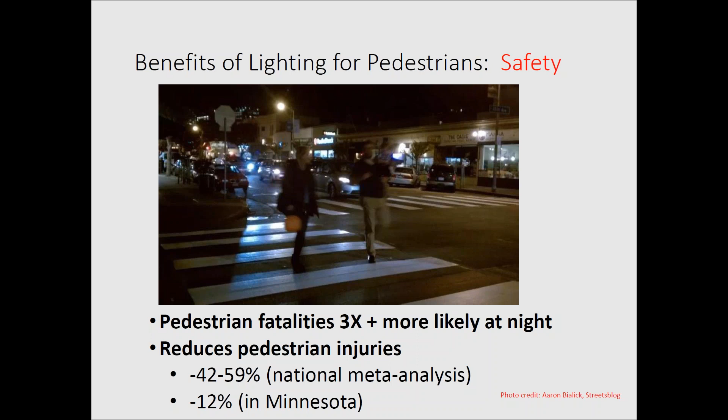Similarly, there are some clear benefits for personal security and comfort related to crime, reduced tripping, and so on. But it can be a little difficult to assess how much of an impact on crime is due to the lighting. If you put lighting enhancements on Street A, is it just moving crime to Street B?

Is it the visibility improvements alone? Because increased perceptions of security may draw more people to the area, and that itself may discourage crime. I've also read a theory that improved lighting can give a message of a more orderly neighborhood, and that can even impact the daytime crime rate too. So if you're trying to assess nighttime versus daytime, and assuming it's lighting, that's further complicated.

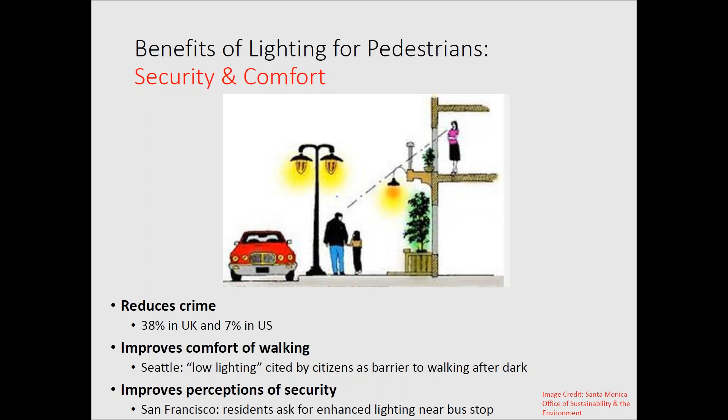In San Francisco, we have historic streetlights on Market Street and Van Ness Avenue, two main downtown streets, and they have been the focus of some serious civic disputes when there's been any threat to their historic nature. Improvements in ambience apply not only to sidewalks and streets, but also often to civic plazas. For aesthetics and entertainment, light fixtures and lighting can interact with art, can even be the art.

I think Vancouver, Canada, the Winter Olympic Village area of Southeast False Creek, is a notable example, with programmed light shows, and also a great variety of different types of lighting fixtures used in this area that make it much more interesting at night.

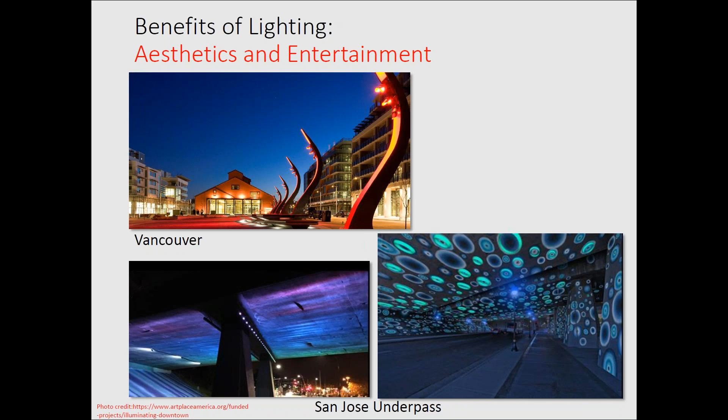The nearby city of San Jose, California, has had a program illuminating downtown that, for example, included reflective art to make freeway underpasses more inviting, interesting, comfortable to walk through, even changing the reflective light levels according to pedestrian and vehicle detection. Of course, there could be some concerns if this becomes distracting.

There's also the potential of lighting to contribute to traveler information. San Francisco has had a concept seriously proposed, not yet fully funded or implemented, but pushed by a nonprofit, to use lights above the surface of our main transit corridor street to show the subway trains moving below, and also to project information on buildings about the subway movements. So those are a number of potential benefits.

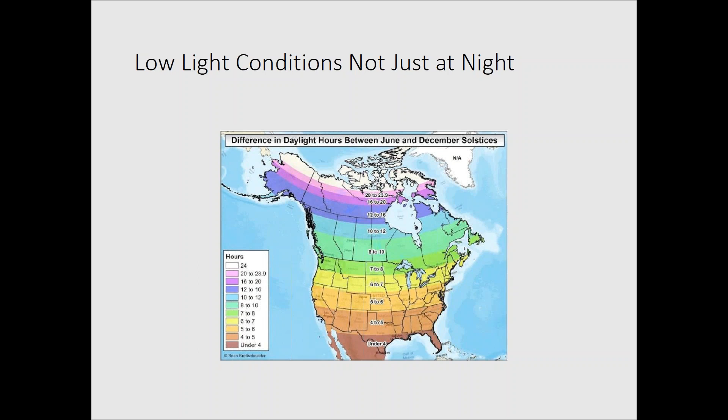I wanted to point out that, of course, low light conditions are not just happening at night. There is a significant amount of daytime in partial or complete darkness, depending on the time of year and the latitude, and thus the benefits of any lighting enhancements can be greater than if you were thinking of them just as applying at nighttime. I'm going to touch on some of the costs or potential concerns with lighting.

First off, there's the financial cost. Lighting improvements can be very expensive. Municipal street lighting is typically a major part of a city government budget. Pedestrian scale lighting substantially increases the costs, and that can make a hard choice of deciding to invest in lighting versus other improvements, and in which locations.

Other potential issues with enhanced lighting, besides the financial costs: you have glare, unwelcome light in travelers' eyes causing disability or discomfort, unwelcome light raising safety, privacy, and comfort issues, and even astronomy and health issues. I think Ron Gibbons is going to speak more to that.

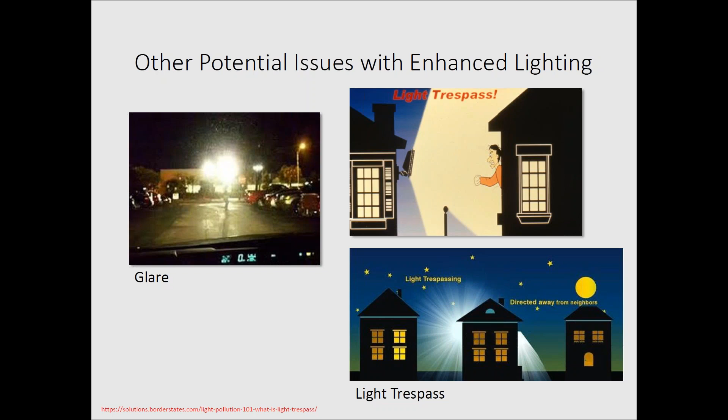Now, looking at some more innovative options, I know Ron is going to speak to the light-emitting diodes or LEDs that are becoming increasingly a common form of lighting, so I'm not going to touch on that. But one other option that looks promising, especially for isolated crosswalks, mid-block crosswalks, is bollard lighting. It's been field tested in several locations. The idea is to illuminate pedestrians in the crosswalk, but not so much the background, to make them stand out.

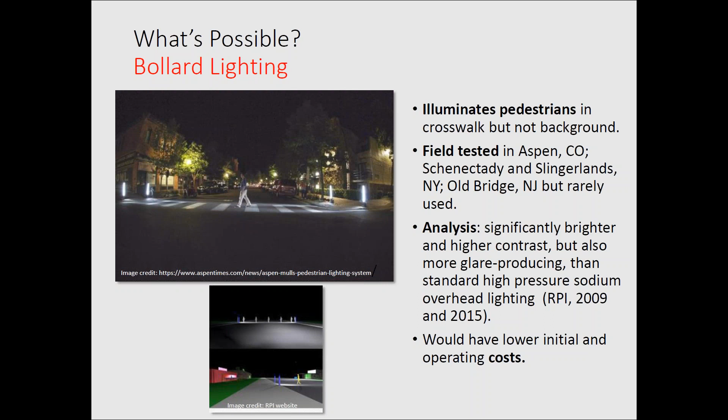However, in Schenectady, when they surveyed the pedestrians about crossing in this type of crosswalk, they were quite positive on average, saying they agreed somewhere between somewhat and completely that they felt safe and secure and didn't experience glare or dark areas. Also, you can use, and they did use, pedestrian push buttons to increase the light levels when the pedestrian is actually crossing, and that can, of course, act as an alert to the drivers to pay more attention.

Smart lighting, it's also called adaptive lighting, that's used for energy savings and safety, especially. I was involved in this multi-city federally funded pedestrian safety measures research project. San Francisco was interested in testing something like what Las Vegas actually did, that is shown here, to use supplemental or higher levels of mid-block crosswalk lighting when pedestrians were detected by microwave or infrared.

And what the UNLV, Nevada, Las Vegas researchers found was a statistically significant increase in drivers yielding to pedestrians. So positive safety impacts. However, relatively high cost compared to some of the other measures like signs and striping and signal phasing changes, and therefore they judged it to have overall fairly low cost effectiveness.

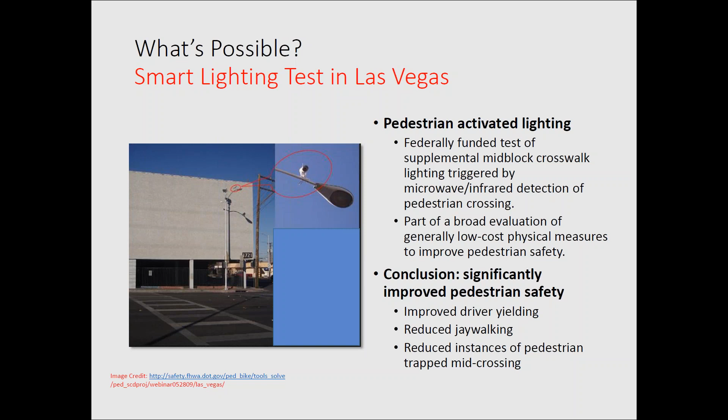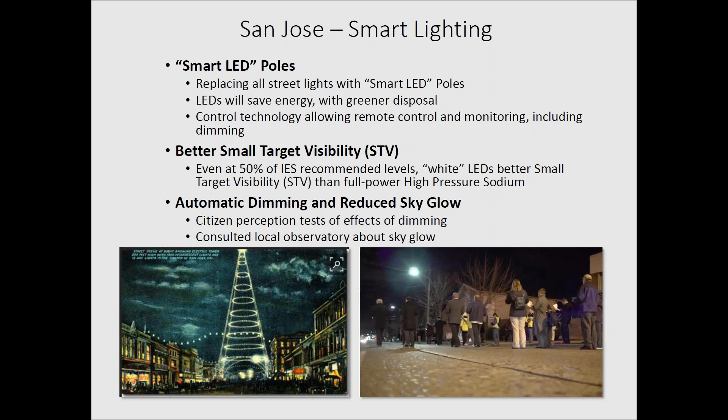Now, much more recently, San Jose has gone somewhat the opposite direction in trying to focus and limit the lighting through remote control technology and LEDs, while also maintaining its effectiveness. I know Ron was involved in the evaluation. Interesting that citizen input was very important, and they even asked the local astronomical observatory for input about sky glow concerns.

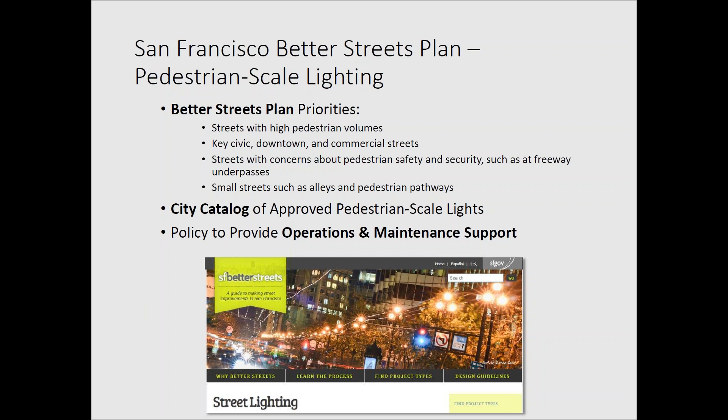And for San Francisco, I'll talk briefly about some of our policies and a couple of projects. First off, San Francisco uses a streetscape pedestrian guidebook or manual, the award-winning Better Streets Plan, which includes a number of policies on, for example, where you would put in pedestrian scale lighting. In addition, the city maintains a list of approved pedestrian scale lighting fixtures and has agreed to maintain them when they were installed through a city area or corridor upgrade project that is typically a transportation planning and design project.

Frequently in our transportation planning projects, citizens express interest in enhanced lighting. There are institutional and other reasons why it can be difficult to provide high quality lighting through these projects. Interagency coordination is required, and it can be complicated, with other departments responsible for the lighting itself. And then the problem may be the tree canopy blocking lighting, and then you're dealing with yet another department or bureau about the tree trimming. You're dealing with potentially other civic disputes or issues.

We've found that citizens may complain about lighting at an intersection that meets the Illuminating Engineering Society IES standards, but it could still be challenging for drivers to detect pedestrians if there's poor contrast, other distracting lighting, poor background luminance. And finally, funding is another issue. For example, our transportation sales tax, the bread and butter funding source for a lot of transportation improvements here, generally doesn't support lighting enhancements.

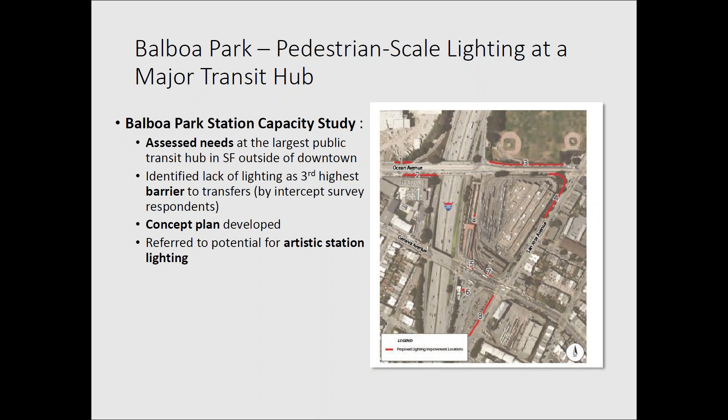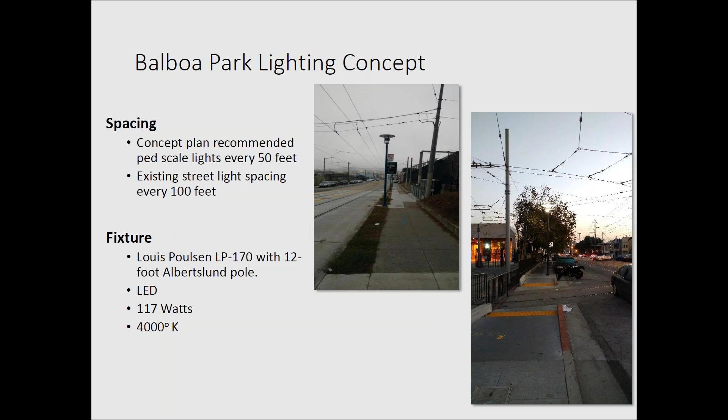And the pedestrian scale lights were installed pretty much as mapped, and they were installed about every 50 feet, and that supplemented the existing street lights that were spaced about every 100 feet. This concept turned out to be very successful, effective but unobtrusive lighting with good color rendition.

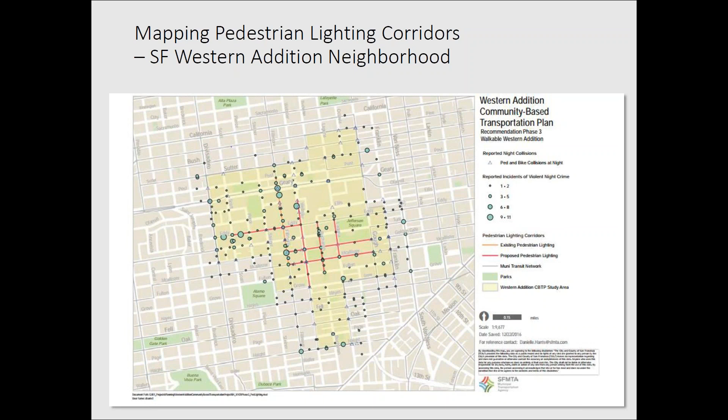And the last project I'm going to mention is a transportation planning project in a lower income area near our downtown, in which pedestrian scale lighting was prioritized for those red blocks based on public transit service, nighttime safety needs, and security needs. And I know James Lee is going to discuss Seattle's experience in prioritizing locations for pedestrian scale lighting.

So to conclude, I think there's a lot of room for additional information provision aimed at transportation planners and engineers, perhaps a manual that supplements all the technical material and the research that's out there. And I am pleased to be a part of that. So that concludes my presentation, and I'll look forward to our discussion later.

Okay, wonderful. Thank you so much, Frank. I think that's a great collection of good lighting principles, as well as some highlights from your neck of the woods. I think we'll keep that theme, and we'll visit Seattle next and find out what's going on up there with respect to lighting projects. And we have James Lee, who will take over the screen shortly and share some of the experiences and different lighting projects that have been happening in Seattle, and sort of how they fit into the bigger picture of what's going on there. So James, I can see your screen, and please go right ahead whenever you're ready.

Perfect. Hi, everyone. My name is James Lee. I'm with the Seattle Department of Transportation, and I'm here with you today to talk about lighting projects in Seattle. So a little bit of overview. I'm going to give some background about Seattle and the program that I'm in. I'm going to talk about the lighting guidelines that we use for LED lighting. I'm going to go over some projects, and then Q&A is reserved at the very end of all these presentations.

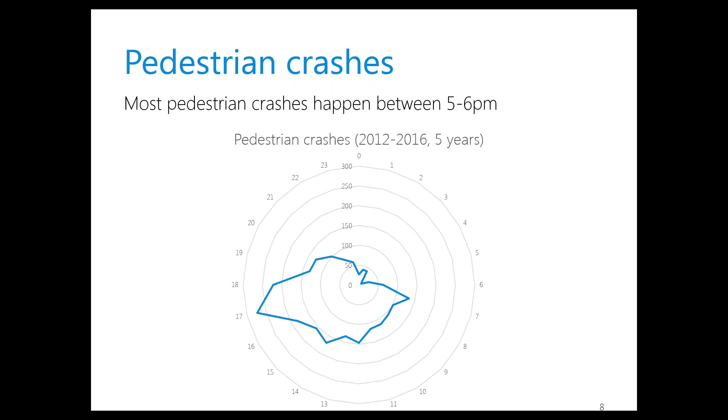Our lighting guidelines are based on the CIE 115. The CIE provides recommended practices for designing lighting systems for motor and pedestrian traffic based on several parameters present in the roadway system, and it places weights on the roadway characteristics from -1 to 2.

So when you go through all these criteria, you add up these weights and then you plug them into the chart below, and it'll tell you how many foot candles you should light the intersection or the roadway segment to. So I can go over these. Generally, higher speed limits present more risk for people walking or biking when struck by a vehicle.

With center turn lanes and medians or one-way streets, center turn lanes and medians can help block glare from oncoming vehicles from the opposite lane, so less lighting is needed. With bike facilities, generally, higher weighted values are assigned where bicycle traffic is anticipated. With the Pedestrian Plan Priority Tier, I'll go into this a little bit later, but more lighting should be placed where we have a higher pedestrian classification. With block length, shorter blocks mean more conflict areas due to increased intersection density, creating more interactions between people walking, biking, and driving.

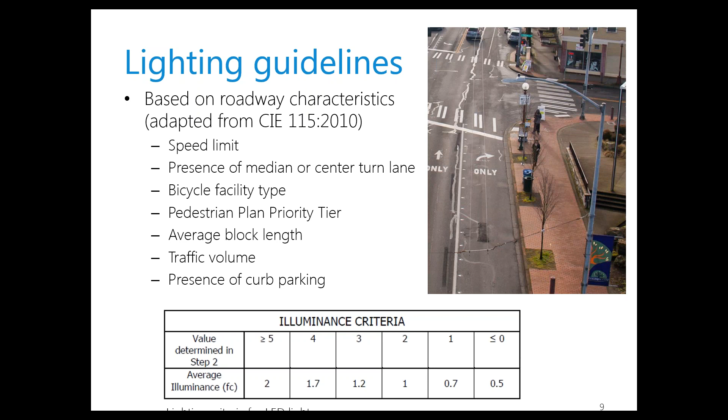With traffic volume, based on an FHWA study, lighting levels should be increased on roadways with high average daily traffic volumes and reduced on roadways with low average daily traffic volumes, since light levels have an impact on reducing crash risk for roadways. And with the presence of curb parking, parked vehicles may create potential for pedestrians to cross mid-block to get to their vehicles. So all these create some kind of conflict that we factor into our illuminance criteria.

With our pedestrian lighting prioritization, we focus on 5 criteria here. Pedestrian demand is based around land use and pedestrian generators. With socioeconomic analysis, we look at equity factors such as socioeconomic and health factors, such as car ownership, diabetes rates, and disability rates. Street type is based on the street segment and how we intend to use it. With lighting gaps, we have areas where we have no lighting. This could become a barrier for people who take the bus and need lighting for security between the bus stops and destinations.

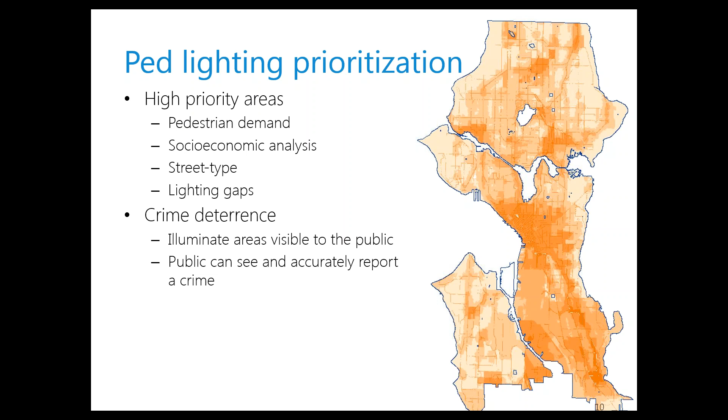And with crime deterrence, I can tell you one story. Back in 2009 in the city of Seattle, a police officer was killed. And when they were asking witnesses to identify the car that got away, the witnesses were describing the car as a gray colored car, but in actuality, it was a light blue or sky blue car. And the reason they couldn't identify this car very clearly was because it was parked under a yellow high pressure sodium light. So with our conversion to LEDs, the white light, we see all the colors. So it helps with the personal sense of security when you're a pedestrian walking, and it also helps the police when they are asking witnesses to identify what this person was wearing, what they were driving, and how they're getting away.

With our LED conversions, we converted all our high pressure sodium lights to LEDs. We started out with residential streets in 2010, and we just completed our conversions of the arterial street lights this year. We have a current relationship with Seattle City Light, which is our lighting utility company. Our memorandum agreement with them is that we, the Seattle Department of Transportation, dictate the lighting levels for the roadway, and the utility company, Seattle City Light, is responsible for installing, removing, or maintaining these lights.

And with the community feedback, when we first did our installation of the LEDs, we were piloting these LEDs with a 5,000 Kelvin color temperature. We heard from people that with the 5,000 color temperature, the lighting felt very cold. So we experimented, and we eventually settled on 4,200 Kelvin, which is pretty standard across all the lighting fixtures that we use, cobra heads, pedestrian lights, and it's a lot warmer than the 5,000 Kelvin temperature, and it's pretty close to the color temperature of moonlight. So that's what we settled on here in the city.

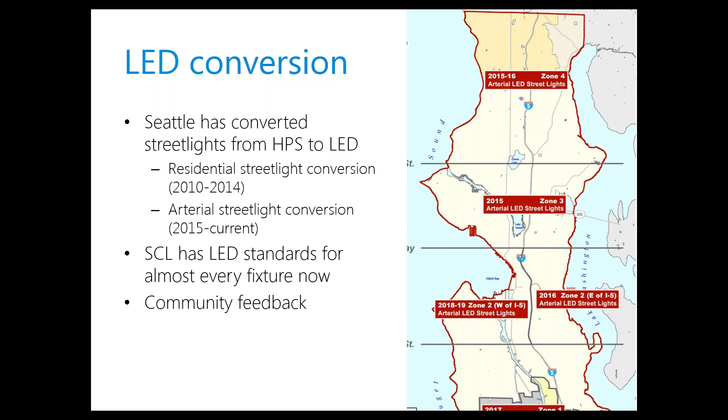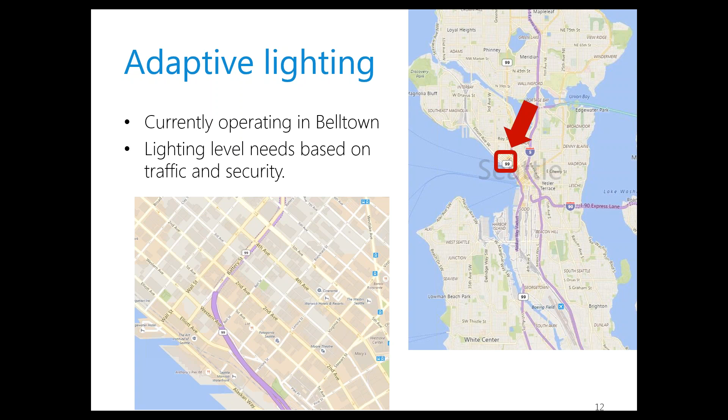With adaptive lighting, we are currently operating in our Belltown area of Seattle. This area has a lot of nightclubs, bars, a lot of nighttime activity. So the lighting level we used for the adaptive lighting here was primarily based on traffic and security. We use about 80% lumen output from dusk to 1 a.m., and this is for traffic in that area. And after 1 a.m., when all the clubs and bars let people out, we increase that lumen output all the way to 100%. So this is only focused in one area.

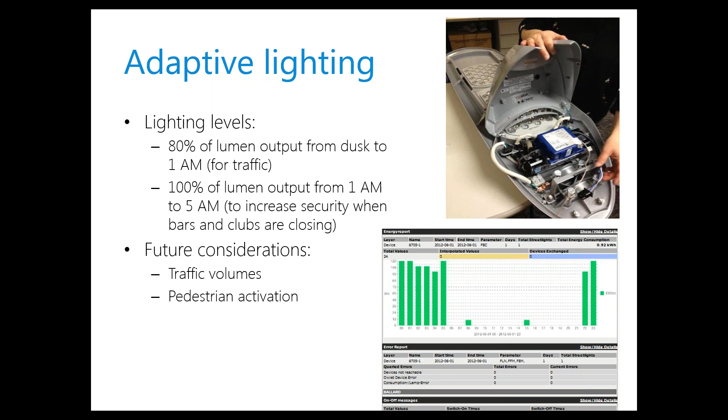Some future considerations for adaptive lighting are we might take a look at traffic volumes and change the lighting based on that, or maybe use some sensors and change how much lighting is used based on pedestrian activity.

The importance of this project was to provide a connection between existing routes on the Ballard Bridge to two RapidRide transit stops. So RapidRide is our bus program where we have buses running at about 10 minutes or less frequency. We take an existing line and then we look at bus stop consolidations and off-board fare payment systems to reduce travel times by 10 to 15%.

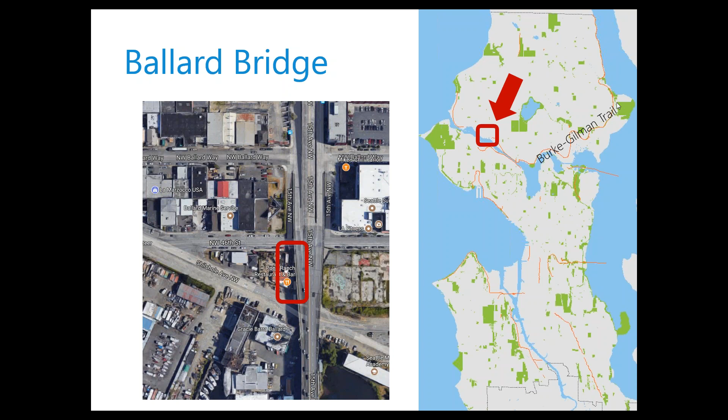There's a lot of people walking and crossing the street and using this path here. The project goal was to improve the connections between the Burke-Gilman Trail. The Burke-Gilman Trail is right here. It's this orange path that extends all the way from the north city limits, if you can see my cursor, and it wraps all the way around. It's 27 miles long. And it connects people who are biking or walking along this path to these two RapidRide stops.

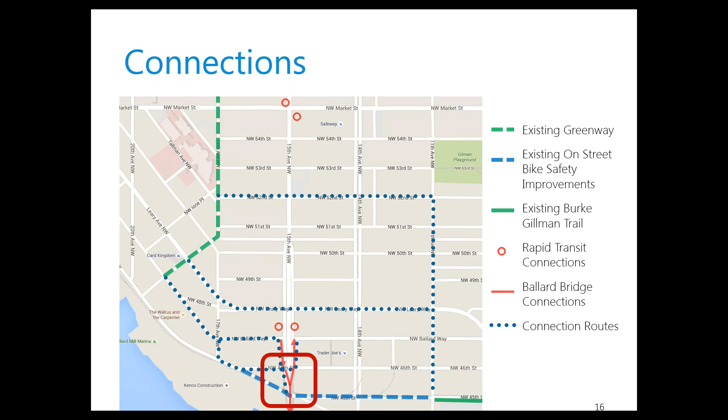And since we have a deadline for this project, it's FTA funded, we need to construct this project quickly. So we need to find some off-the-shelf lighting products. In general, poles and light fixtures have long lead times of about 3 months, and we wanted to construct this lighting project in well less than 3 months.

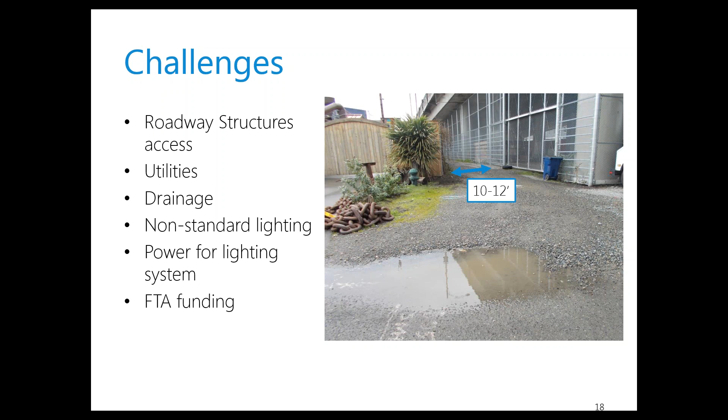For the installation, we found a linear LED product that includes extruded housing to make installation easy. The extrusion housed all the cables, LED strips, and frosted lenses for a clean installation. We not only used a marine adhesive to glue this to the bridge, but we also doweled the extrusion housing so that it won't jiggle loose or fall off due to the vibrations of the bridge.

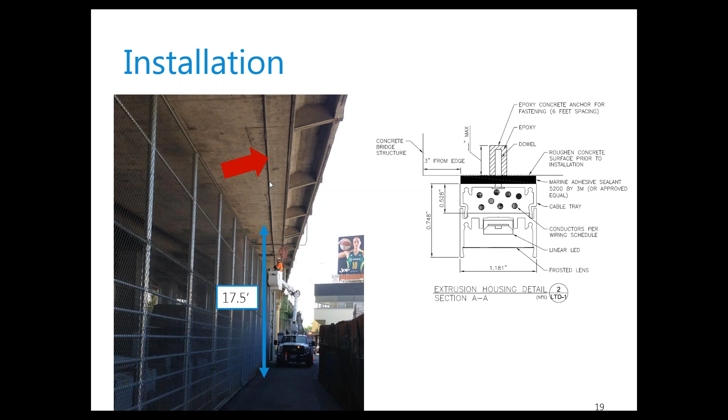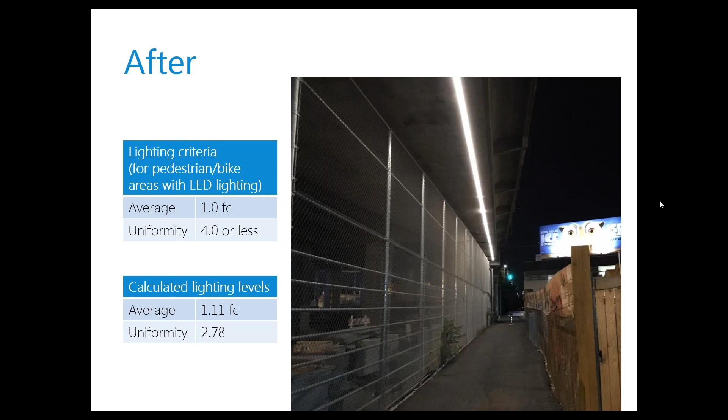And this is what it looks like at night. This met our lighting criteria for pedestrian and bike pathways. Our lighting criteria is 1 foot candle and a uniformity of about 4 or less. Our average is 1.11 foot candles, and our uniformity exceeds what we're looking for. So 2.78 uniformity means the lighting is pretty uniform here, and it's not focused on one area; it's pretty uniform lighting throughout the whole trail.

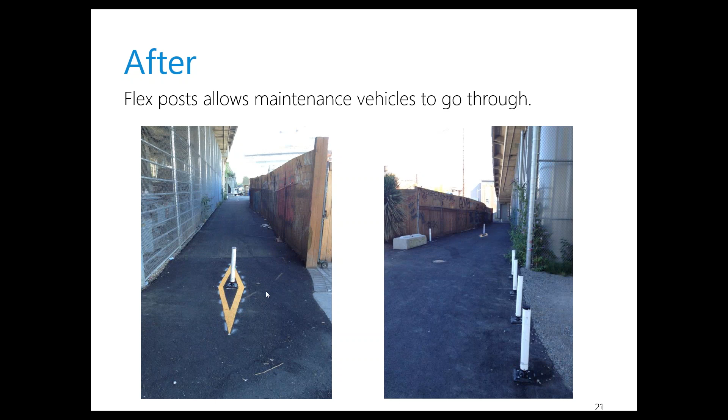We also installed some flex posts, which allow maintenance vehicles to access this maintenance yard or go through this area pretty easily. These flex posts can be run down by any vehicle, and they also help delineate bikes going through this area.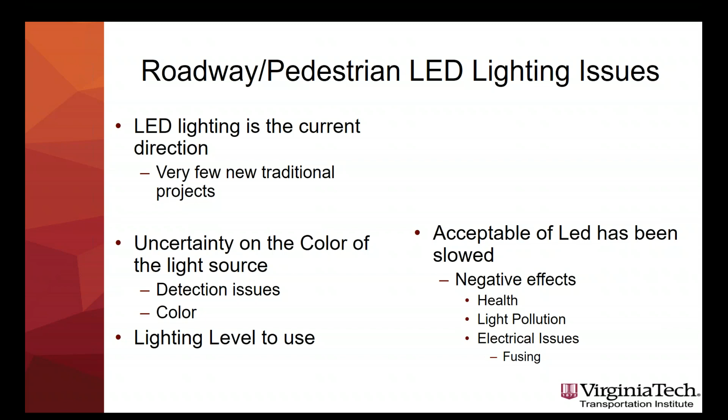Some of the things that are limiting the application of LEDs right now, I'd say first, though, that LED lighting is the current direction. I don't know of anyone right now who's designing anything with traditional light fixtures. But the uncertainties that are kind of impeding some of those things were the color of the light source, the impact on human health, which lighting level to use, and all those are coming into play. And then of course the negative effects, light pollution, electrical issues, fusing, all those things come into play as an impediment to LEDs. So our research is really focused on looking for just-right lighting.

And what we are talking about there is looking at what I refer to as the six factors of lighting design. There are the six, and we're trying to balance these things. So obviously roadway user safety, so drivers, pedestrians, crash reduction, pedestrian safety, all those things come into play as one. Energy consumption is always a concern. Impact on health, public perception and acceptance. Are people comfortable in the space, and are they willing to use it? Impact on light pollution, impact on surrounding areas, flora and fauna. And so one of the things that we've talked about is the way to balance some of these things is really to start looking at adaptive lighting.

And so our approach now, which lighting designers are beginning to talk about, is to consider light as a drug. And with every drug, there's a benefit and a side effect. So if we provide lighting that can make a pedestrian feel more safe, but it is changing bat migration, we have to balance those two things. And so we have to determine the appropriate dose that will provide all the benefits and minimize the negatives. And the nice thing about lighting is it's what we call a rise and plateau kind of response.

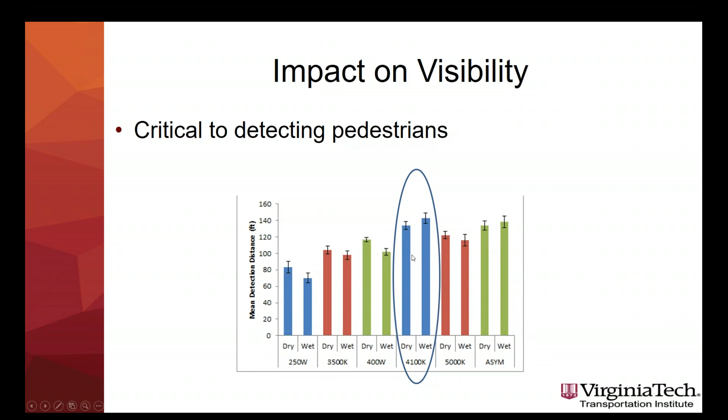And so this is the same data. I just removed some of the dimming and some of the other things that came into play. But you can see the comparison of a 400 watt high pressure sodium to the other whiter light fixtures, with 4100K coming out. What we believe is happening here is the addition of color contrast. So in a high pressure sodium or low pressure sodium world, color doesn't really come into play. We already heard the example of the gray car. And so now if we start adding color to the world where reds look like reds and blues look like blues, we're starting to have an additional benefit through that, and that's one of the benefits of the light sources.

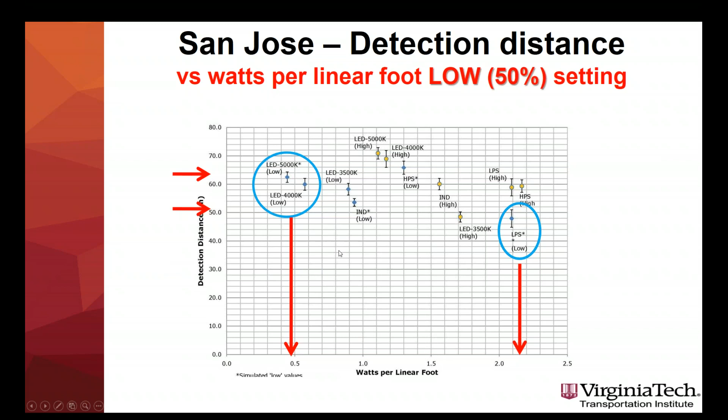And so then we said, well, what happens if we dim? So we actually reduced the lighting level to 50%, and the dimmed LED dropped down to the same levels there were under the low pressure sodium at the beginning, but we then took another 50% off the energy use. So now we're at a quarter of the energy consumption with this installation, but have the same detection. So those are the kind of numbers we're seeing when we start adding in these white light sources. And again, in this case 4,000 popped out as being the highest performance, again, we believe, because of the color contrast.

So the negative impacts of roadway lighting. We've got this positive benefit of roadway lighting, and have started to look at CCT. Now the negative impacts: obviously health effects, sky glow, and what we refer to as the bugs, buds, bears, and bass. Buds being flowers, not beer. But anyway,

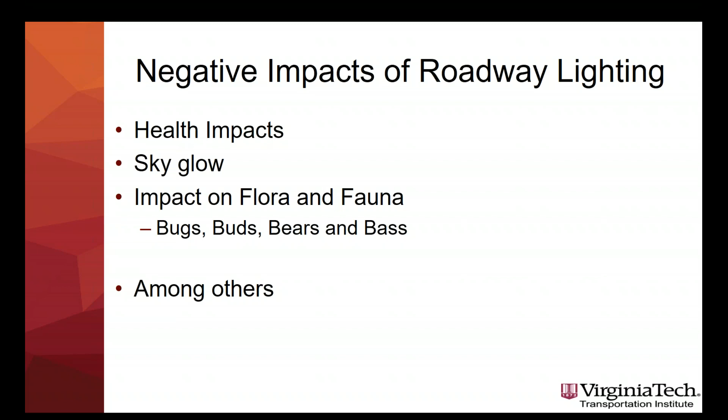so one of the things that happens is as we start adding lighting into the environment, we're impacting anything with eyes. So sea turtles, migratory animals, all those things. And for example, a robin, if it nests in an area that's close to a light fixture, it actually starts singing much earlier in the morning.

So it can sing up to 2 hours earlier in an area that's close to a lighted roadway. So these are all things we need to consider. The AMA came out with a report that says use 3000K. They did not consider the driver safety. They did not consider the crash risk, visibility.

All they talked about was primarily the impact on humans, migratory animals, sea turtles, and sky glow. So they didn't talk about these other issues. So it's not really a balanced report, and so we're doing some work right now to deal with that. But basically, there is a strong link between lighting and health, and this is particularly for shift workers. It impacts your sleep, your alertness, your general health, and your melatonin levels.

And so your cell phone, your TV, they're all producing a lot more blue light. We're experiencing a lot more blue light than we used to. We're sensitive to all light, but our highest sensitivity is in the blue range. So it's highly dependent on dosage. This impact depends on the spectral effect and the amount of light you're experiencing and the timing

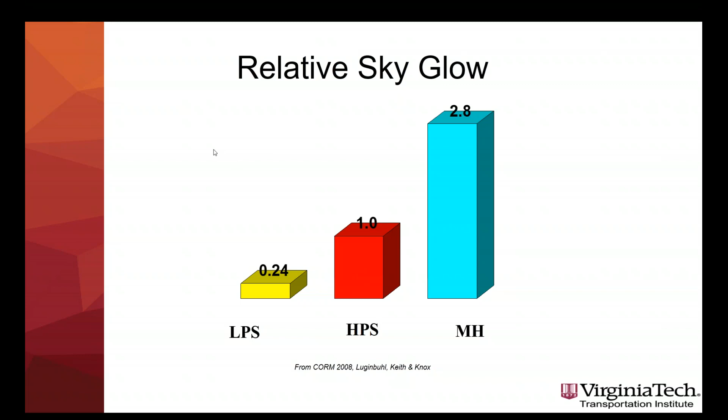When the night starts getting longer, that triggers the plant to flower and create beans, and all the energy from the plant goes into the creation of that bean. So basically the plant consumes all of its energy and kills itself to create the bean. So under areas where the light fixture is, that transition doesn't happen, the flowering doesn't happen, the plant keeps growing. So you find that the plants grow very tall, but produce very few beans.

So our solution approach is adaptive lighting, and basically the goal there is to get as much lighting out of the atmosphere as we can, and to only use the amount of lighting that we need. So obviously it requires dimming. Traffic volume, weather, pedestrian usage, lighting conditions, these all come into play. And we've developed a luminance selection methodology that is documented in an FHWA document from 2014, which talks about this.

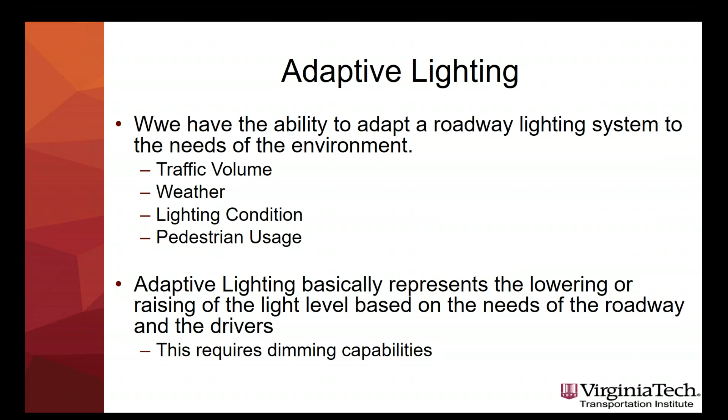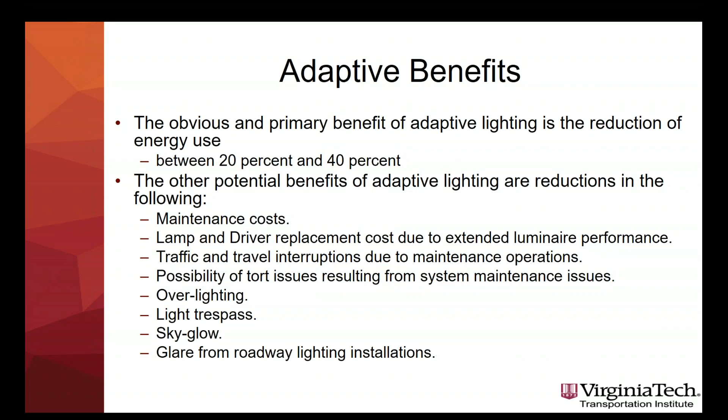But basically what it does is if we dim, we get additional energy savings between 20 and 40%, but it reduces maintenance costs, reduces interruptions to maintenance, overlighting, light trespass, sky glow. All these negatives that we're talking about are actually reduced by dimming and really controlling our light system to be what it needs to do. So it's only providing the amount of light we need.

And so some of the criteria here are speed, traffic volume, the presence of a median. If you've got a median that is wide enough so that a driver doesn't get glare from an opposing driver, you can actually use less lighting. Intersection, interchange density, ambient luminance, guidance, again, pedestrians and bicycles, parked vehicles. If somebody has a potential to step out from between a parked vehicle, if you need to see their faces and what they're doing, that comes into play.

And some of these are counterintuitive. We have evidence now that if you look at level of service on a roadway, an A, B, and a bit of a C level of service, lighting can come into play. Certainly in a C and D, there's benefits of lighting for crashes, but once we get into levels of service E and F, actually adding more lighting doesn't do anything, and there's a potential that we can actually turn the lighting off, because of the approach that if the car in front of you doesn't hit something, you're not going to hit something. So those are some of the things that can come into play here with adaptive lighting, and we're still working some of those things out.

Issues for pedestrians, light outside the roadway. Typically on a high pressure sodium lamp, we've had terrible optics, and so the optics have just automatically scattered light outside of the roadway onto the sidewalks, and we've never really specified how much light we need to put on a sidewalk. But LEDs have the ability to really limit how much light comes out of the roadway. And so now we're looking at having to develop a criteria for lighting outside of the roadway, not just the roadway, to provide visibility for pedestrians and for a deer running through the woods. Not that the deer needs the visibility, but you as a driver need to be able to see that deer. So those are some of the things we're doing.

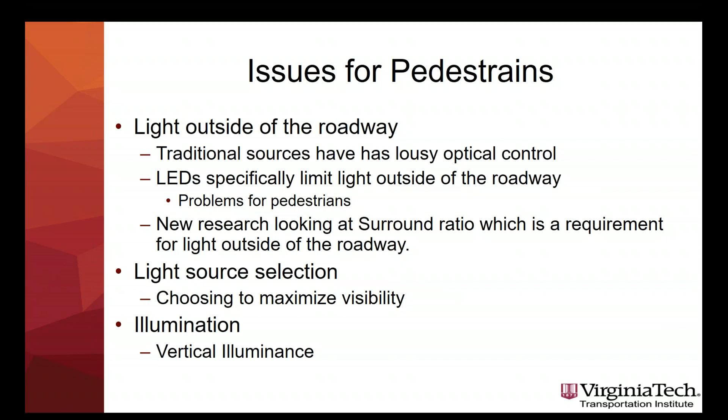Light source selection, we want to choose a color temperature that maximizes visibility but minimizes some of the other issues, and illuminance. Vertical illuminance is where we're going with the criteria. And so what that means is we're looking at how much light falls on the surface of the person, not just how much light falls on the roadway. So that bollard design that was shown, it's great at illuminating the person because there's lots of vertical light in there. The problem with vertical light is it also shines in drivers' eyes, and so the bollard highlights the crosswalk, but doesn't actually necessarily create visibility. So these are the things that we're starting to work with.

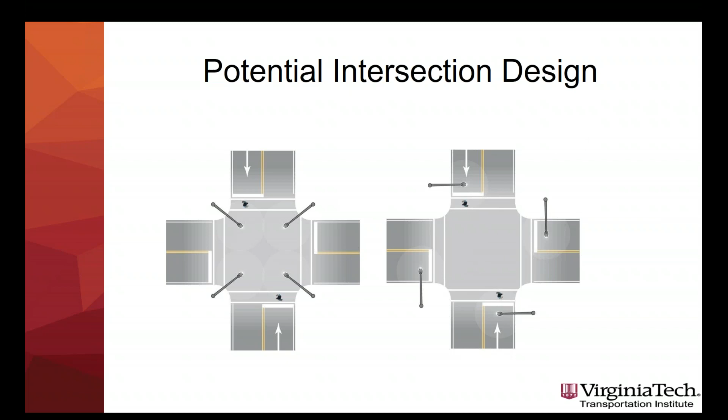So the impact on lighting design for a pedestrian would be to move that luminaire from right over the top of the crosswalk and put it so that the luminaire is actually lighting the front face of the pedestrian rather than the top of their head. The same goes with intersections, where we're pulling the traditional design from a luminaire on a pole out of the intersection into the space. There's actually 2 research efforts going on right now, one in Virginia and one in Illinois, where we're looking at that, because the intersection right now is lit to a brighter level than the roadways, and so there's some issues with contrast and making sure that we're lighting the pedestrian.

The other problem we've got is making sure that the pedestrian on the far side of the intersection is as well lit as the person on the approach side of the intersection, and so that research is ongoing at this point. But if we start thinking about the future, obviously connected vehicles, connected pedestrians, if you start thinking about where we can go with a connected and a smart system, we are now talking about things like lighting on demand and being able to turn on the lights as required for a pedestrian.

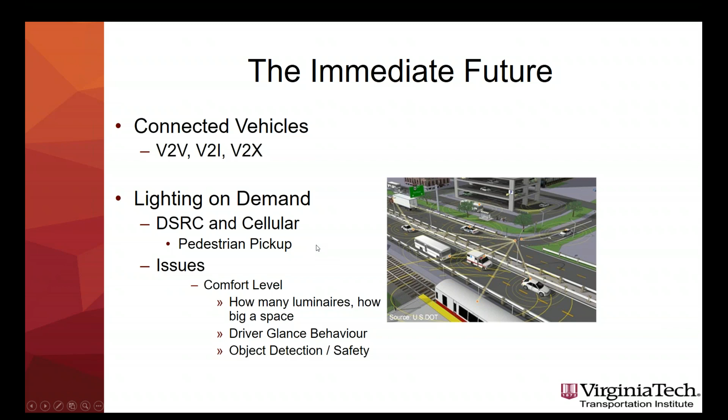They've got an app on their phone that turns on the street light kind of idea. So if you start thinking about this, again, this is the concept of lighting as the network and as the backbone. So you can start looking at using the lighting system to communicate things from your ITS network. Your signal phase and timing can all be communicated across a network.

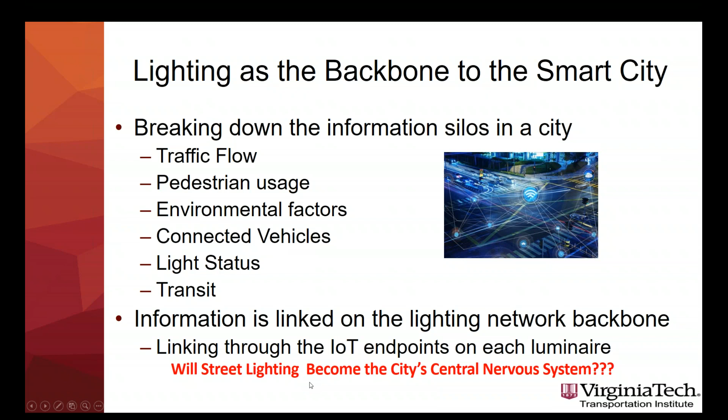That includes the lighting, and you can have the lighting react to the presence of those things. Loops in the road can come up, and we believe the street lighting can actually become the city's central nervous system.

So we did some work and looked at visibility and whether we could actually control the driver's speed, if we don't give them as much visibility in front of them, they will actually slow down. Unfortunately, they do not, and we need a little bit of light behind them. But now, if you imagine we've got a pedestrian out there with a phone, the lighting will actually highlight the presence of the pedestrian.

So long-range future for us, more autonomous vehicles, and we're going to start hearing rumors that we don't need lighting because the vision systems on the vehicles will do everything we need. But in particular for this discussion, pedestrians will always have legacy vision systems. So you've always got eyeballs coming into play. So there's always going to be some form of lighting so a person can walk safely. That's really where we're going and how it plays into the pedestrian lighting issues. So I think that's all I had.